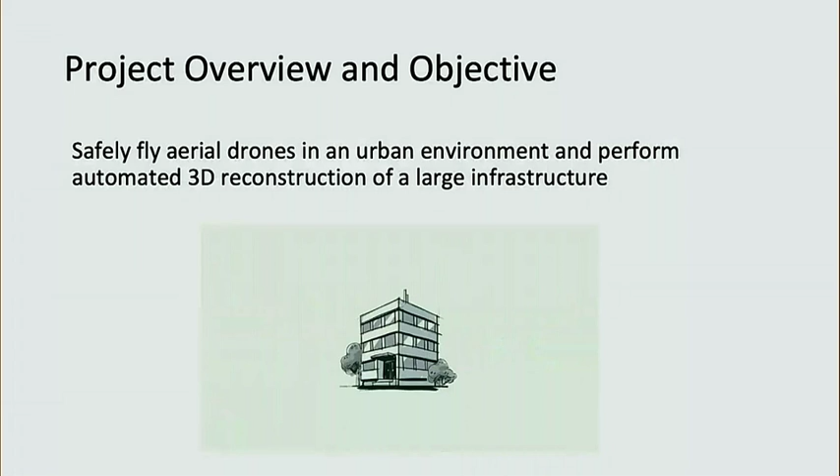So I consider AIRSCAN to be made of three pillars, okay? Under these three pillars are the project leaders and principal investigators. On the safety control side, Claire is going to explain this in more detail, making sure that when the drone is flying in an urban environment, it's going to be safe for humans. Then we have the VR interaction, VR user interface, which Alan is going to explain in more detail.

So some people are wondering what are the applications of AIRSCAN. I can list down three key applications here. Number one is you can use it for monitoring construction projects. In fact, last year I was talking to the DPWH director for monitoring, and he mentioned to me that one of the key challenges of DPWH is monitoring projects in remote areas.

So typically they send engineers to remote areas to take pictures. And he said it's even better if we have a tool that can perform 3D reconstruction, so we know the extent of the progress of the project. DPWH, by the way, is a government department in charge of public works. So before they pay the contractor, they have to ensure that they completed the projects.

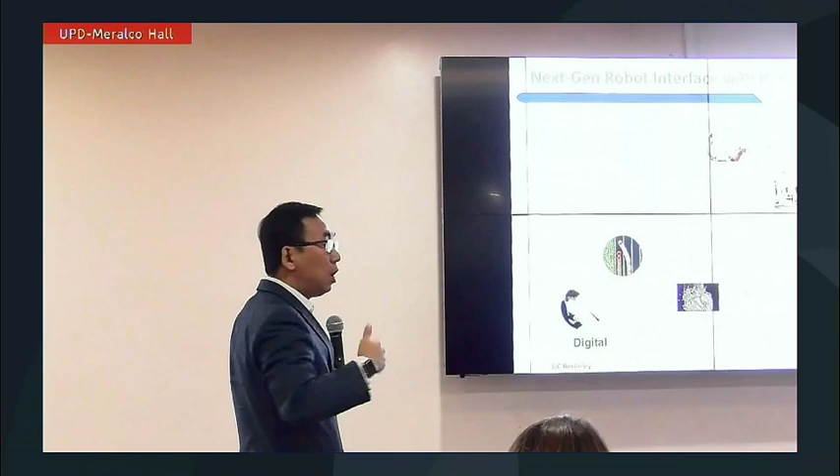When you affect the physical world, you want a certain type of observation of how your behavior caused the change. So you also have perception through sensors. You observe the change of the environment, the change of the human in the world, and then you feed that back to the digital system.

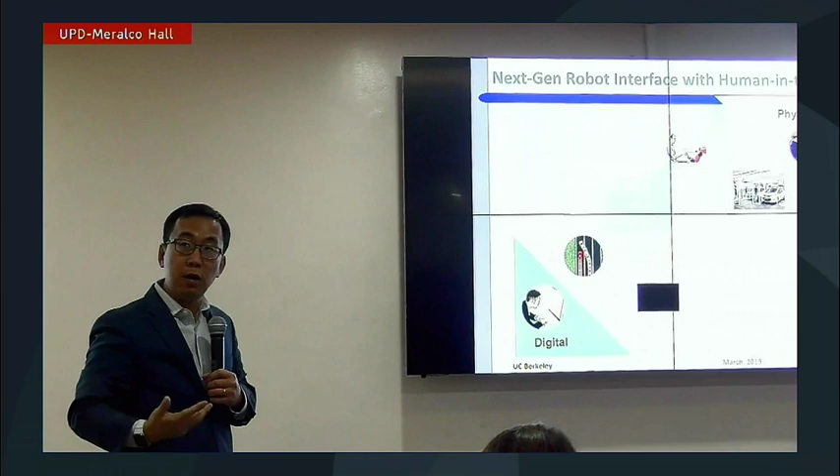Based on that perception input, you potentially want to change the behavior, whether you are driving a car or collaborating with a robot. In this process, humans play a significant role in both changing the control and perception.

Just to give a quick example, I think in the US and many other places, autonomous driving is really a big topic. No matter how much you have heard about autonomous cars crashing on highways, there are a lot more cars crashed by humans than by autonomous cars. So the safety, perception, and control of the human play a much more important role in the behavior of the system, at least for now.

Maybe in the future, cars will be fully autonomous with very little human input. But for now, human input is actually a huge factor that changes the behavior of the system.

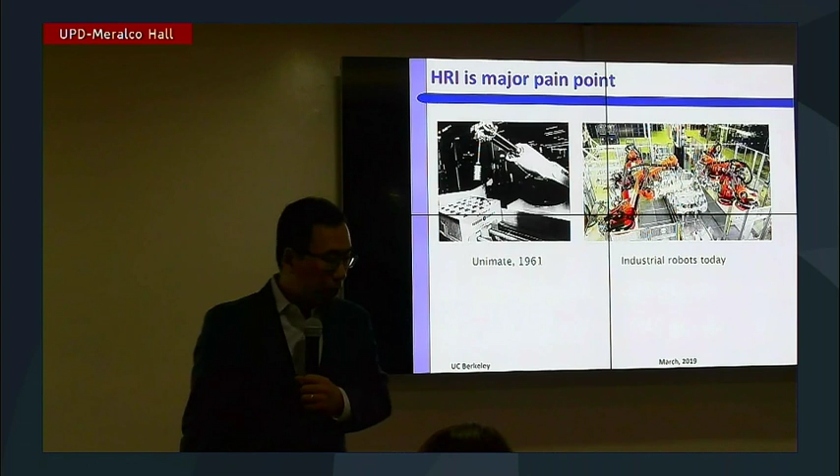So talking about that, this leads to a key observation I want to point out: having a really good human-robot interface is currently a pain point for using robots in man-made environments, especially domestically, when humans and robots are sharing the space.

So that actually was not the case in industrial robots. Let me give you an example. The first industrial robot I can trace on Wikipedia was from 1961, called Unimate. From this picture, you can see it's just a robot working in the assembly line, putting some merchandise into a packing box.

Now, fast forward more than 60 years, if you walk into a typical factory with robots in their manufacturing line, this is the situation you will see. After 60 years, the interface itself hasn't changed. When you look at the machine, either today or 60 years ago, you have no idea what they are doing. So how do you guarantee safety and better control?

Well, in terms of safety, it's the same old thing. You build a fence around the robots, and then you forbid humans from walking close to them, because you may hurt yourself since humans don't understand what the robots are doing, and more importantly, robots don't understand what the humans are doing.

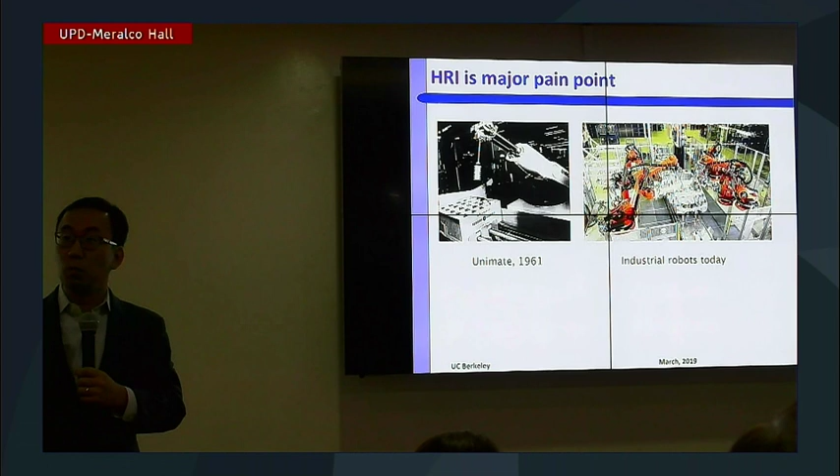And to this point, there is a famous confession, so to speak, from the CEO of Tesla. Tesla is arguably one of the best and most forward-thinking car companies in the US. He tweeted that last year, in the process of pushing out their new Model 3 cars, they made a mistake. He envisioned that in order to make the cars more effectively and safely, he wanted the entire assembly line controlled by robots, with as little human interaction as possible. Then they realized excessive automation at the Tesla factory was a mistake.

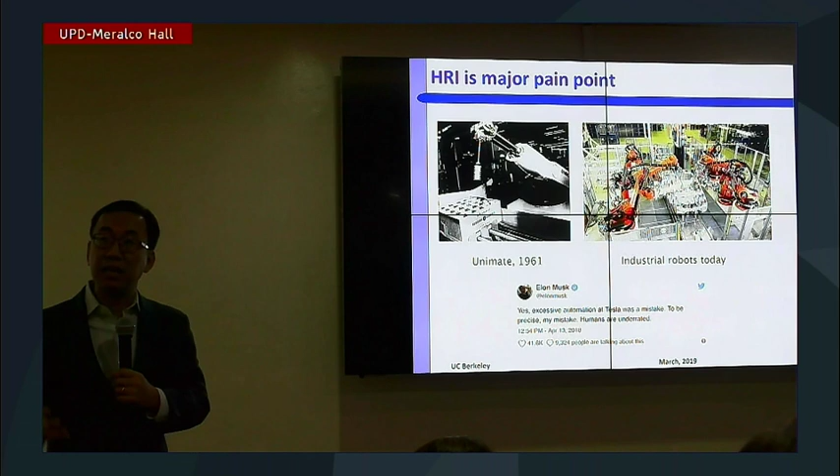In fact, humans are underrated. There are many cases where we still need humans to collaborate with robots. If you, based on today's technology, completely cut out the humans, you will actually compromise safety and compromise efficiency. Okay, so that's the background I wanted to set up.

Now, how do we address this problem? Well, traditionally, one valid way to do that is that you build humanoids. You give them an artificial face and some kind of display, so they can communicate closely with humans. In our group, we actually have a paper that discusses this in a one-on-one conversation setting.

If you have interaction with a human, a real human, there are 4 key cues that really encourage productive conversation or collaboration. Number 1 is expression, a micro expression. The second is head pose. The third is gesture, and the fourth is body scale.

Now, we don't need future technology to give you a subset of this experience. In fact, what we are doing today using Zoom or Skype actually encompasses the first two parts. If you can capture my face, and then capture my head pose, you know what I'm looking at, my attention. So this is the traditional teleconference.

But in addition to that, if you add gesture and body scale in real size, in the real world—so if I am not physically here today in the Philippines, but actually in Berkeley—in the future, imagine I could virtually be here as a full-scale human, and you could see my gesture and my body. That is the immersive experience, enabled by AR and VR, augmented reality and virtual reality.

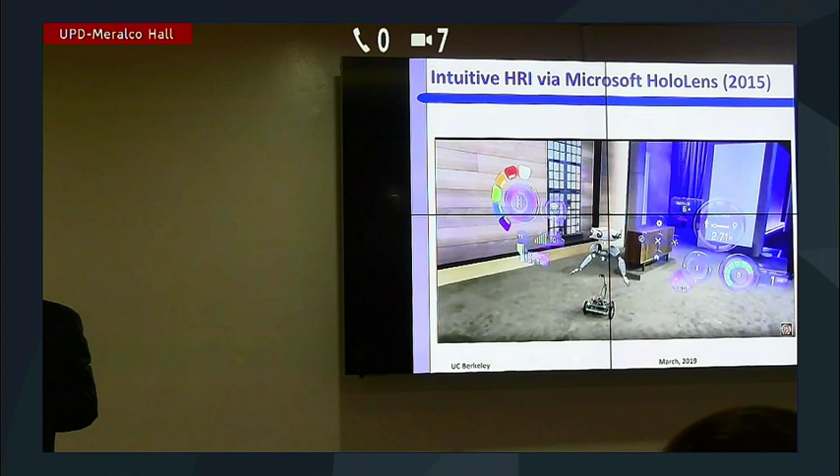Think about that, it's quite amazing, right? Because Microsoft by no means is a main driving force of robot companies. They are not. But when they announced their augmented reality solution for the first time, they were not announcing that for doing Office work or for playing games alone. They were illustrating the best new application for augmented reality, which is to build an interface for robots.

So in this case, whether it's a ground robot or an aerial robot, you quickly realize the robots are moving. The difference between a computer and a robot is computers stay on the desk, they're not going anywhere. But robots are running around. When they're running around, how do you interact with them?

So here, if you don't have augmented reality, all you can see are 4 lights, two green and two red. Green means the forward direction, red means the rear direction. But that's it. You don't know the battery condition, you don't know what kind of task they're doing. You can query that from command lines - you establish a TCP/IP connection and then query it.

But your grandparents may not be able to do that. Your parents may not be able to do that. Your younger sisters and brothers don't want to do that. So how do we do that in a more intuitive way for normal people? I think that is the same vision that Microsoft shared with us.

This video is widely available on YouTube, and in the interest of time, I'm not going to actually play this video from Microsoft. But if you haven't seen it, I highly encourage you to do that. It shows a dynamic path planning example that is very similar to what we do in controlling drones.

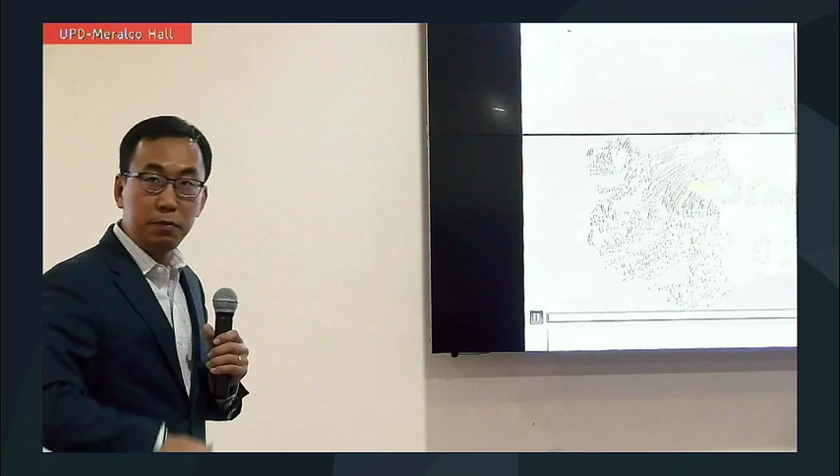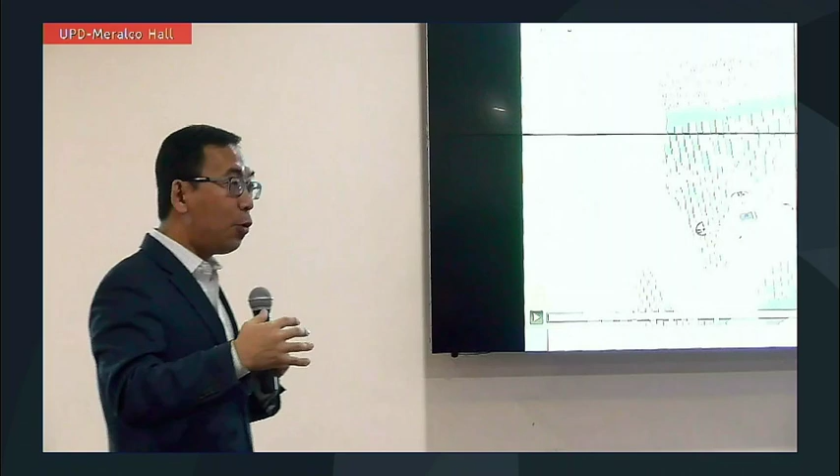So this is a video we just got last week, a collaboration with the nuclear engineering department. Imagine you have a collapsed nuclear power plant - I'm not going to say what is real, what's not real. Because the building has collapsed, when you fly the drone you cannot rely on offline 3D reconstruction. You have to reconstruct the world in real time.

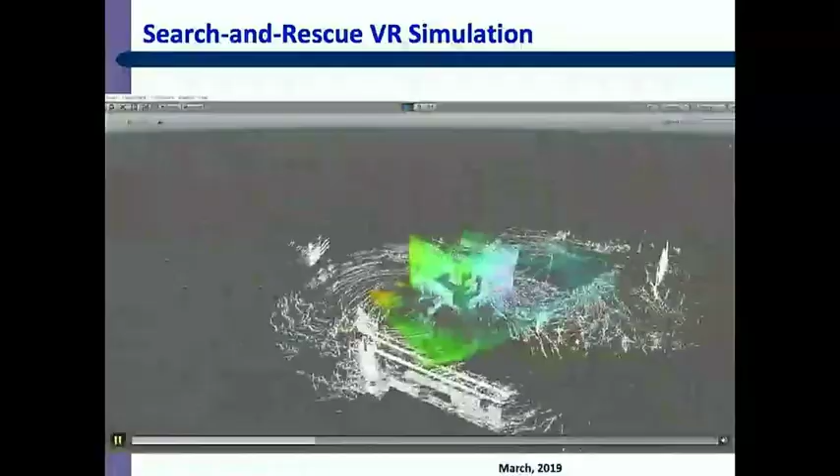So you are seeing a drone carrying LiDAR scanning the world in real time. In addition, the drone also carries a radiation detector integrated into it. So you actually see the overlay of the radiation sources with the 3D reconstruction. Now, this is the result you get from the drone.

Now, when you have a real-world rescue team coming in on the ground wearing something like HoloLens, they can actually overlay the most important information about the radiation on their head-up display. So they will know where the radiation sources are beforehand, so they can avoid those areas. That will really save time, save rescuers' time, and also potentially save victims' time.

So this is a more complex test. We are already working on some other funded projects, and the second one is extending our project to multiple drones. We are able to expand the capability of our system to do that, to get an overall view of the scene.

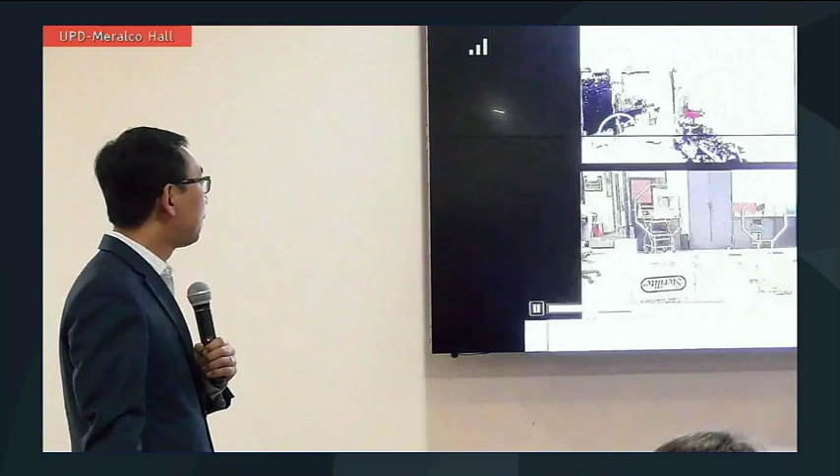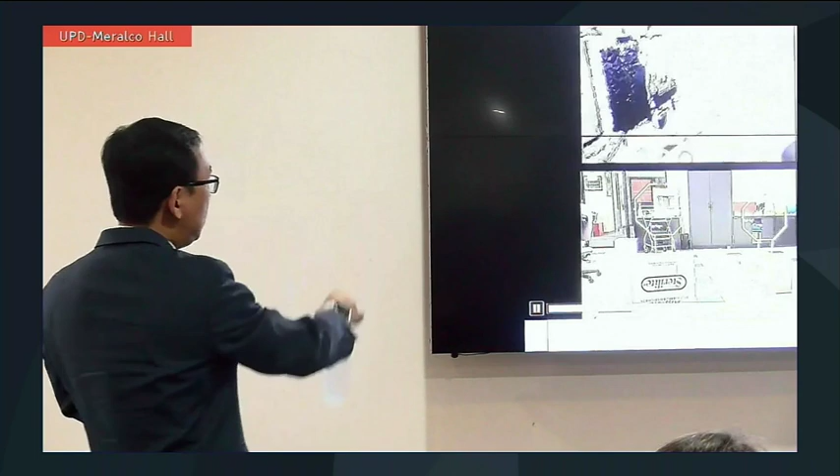As I mentioned, some of the things we want to push forward - but the purpose of showing you this video is to show you that our system works. After the launch button is triggered, the lower right side shows the real world execution of the drones. The location of the drones is synced up in real time into the virtual world, so you can see in real time where the drones are. If the drone is deviating from your plan, you can always grab the drone and ask it to stop.

So that's the first extension. The second extension is to the interface itself. In addition to saying that it is safer and more efficient compared to manual control, now we want to go past that. We ask, if we are already in the virtual space or augmented space, what's the sense of optimality? How can we design a system that's better than the first virtual reality system?

The challenges in designing the 3D UI UX and establishing a sense of optimality come from several factors. The number one is absence of a design standard for 3D UI. Think about it - since the 80s people have been using keyboard and mouse for 2D design, so the methodology has been established. If you're an app developer, you don't have to worry about the user interface, because it's provided to you as an API whether you're using iOS, Android, or Windows and so on. But in 3D, currently there is no standard for 3D UI.

Even worse, the problem without a standard is that if you have two teams developing the same function for controlling drones, it's very likely that application 1 has one way to control the drone, and application 2 has a totally different way. So doing this transition, not many typical users can do that. That's really the pain point hurting the 3D interface.

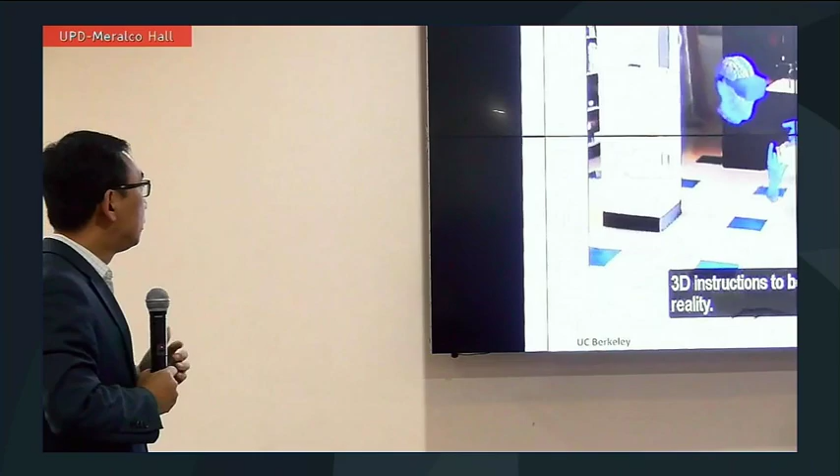So let me show you, if we have all this interaction integrated, what kind of experience we can have. Instead of flying drones, let's talk about maintaining drones - a solution that allows 3D instructions to be overlaid in augmented reality. First, you scan this drone, so you have a scanned drone model.

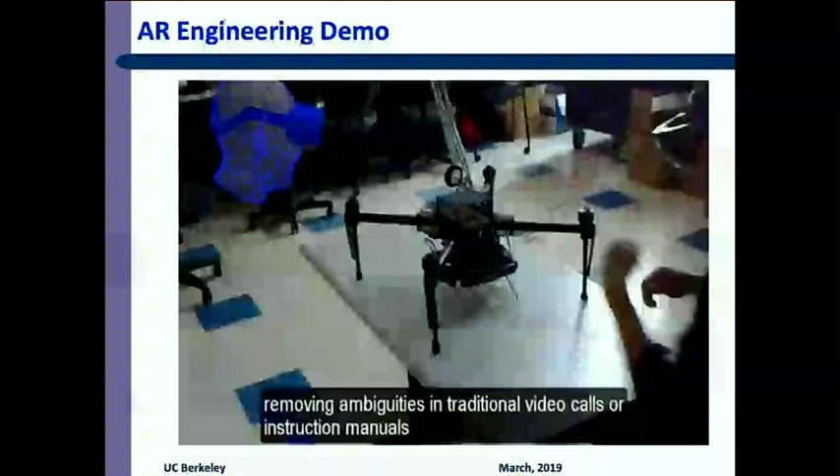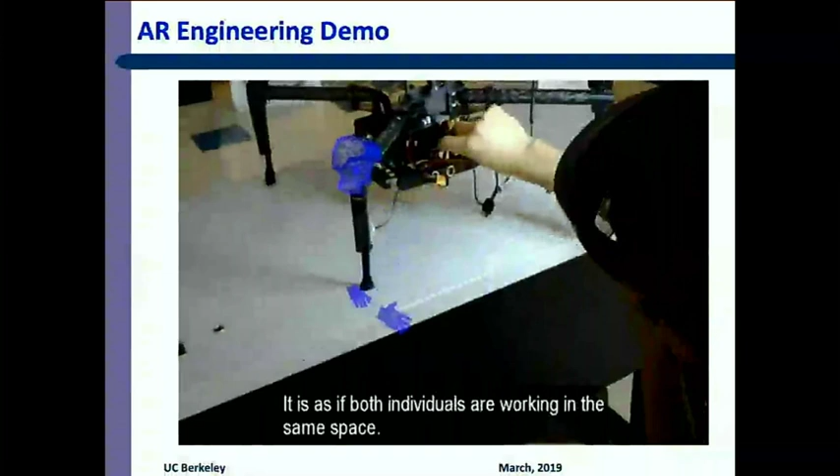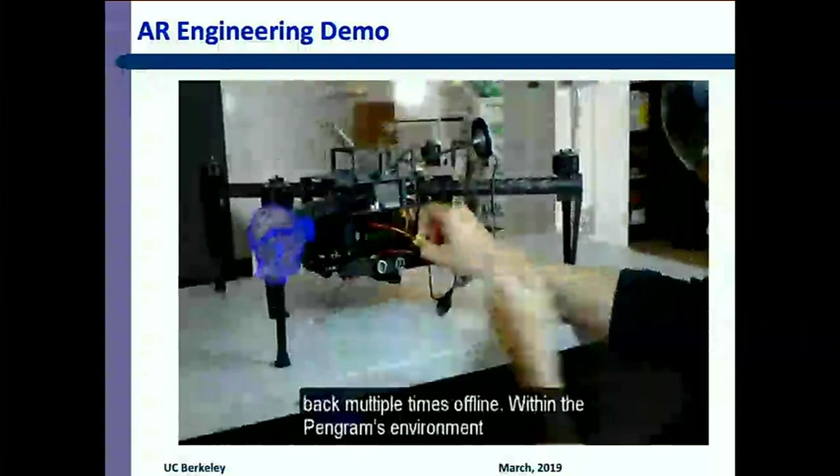As you're looking at the drone in real time, the system can resolve the location of your head, your display, relative to the drone. Once you have that, you can overlay the manual 3D model of this drone as you try to make changes to this model in the real world. You can also augment a virtual expert to guide you in 3D - this isn't reading the manual anymore, this is really like holding your hand in the 3D world.

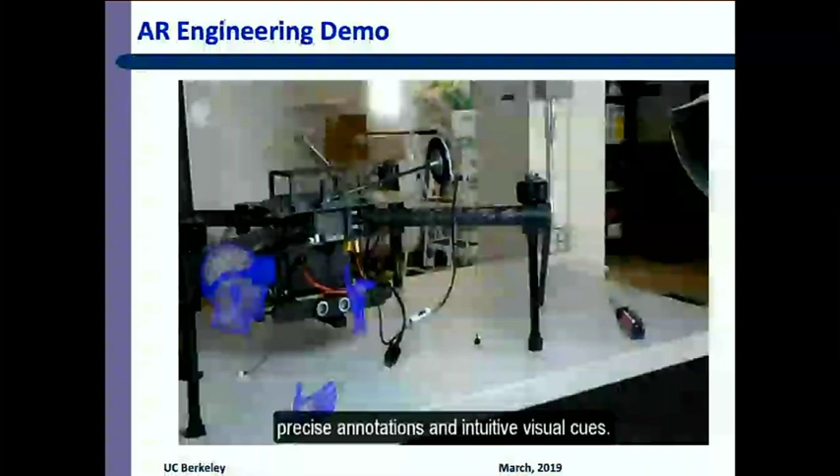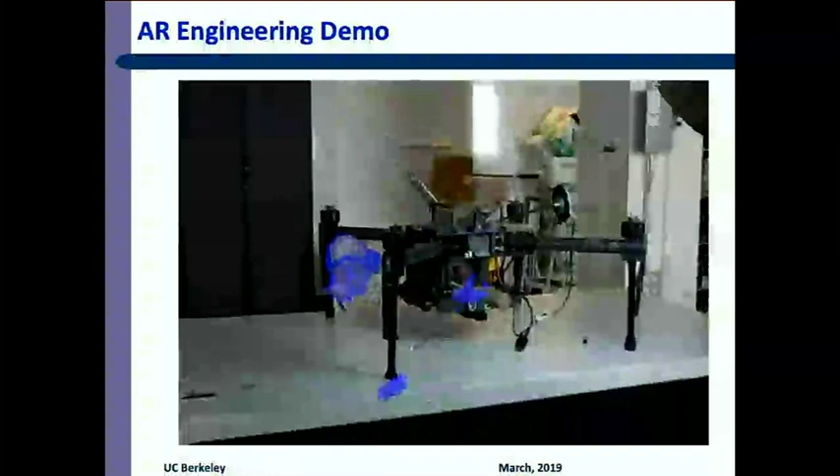The creation of precise annotations and intuitive visual cues - the goal of our program is to eliminate ambiguities that come with complex operations. You can also illustrate what kind of tool you need, and set parameters for the tool so that you don't over-screw or put too much pressure on your screwdriver, and so forth.

Our system actually received the 2018 Microsoft Imagine Cup World Finals, the only mixed reality award, and is also the only US team that received that award.

So I see that I have 5 more minutes. So 2 more minutes? Okay, let me actually go very quickly.

We also have 2 papers published that really try to test the optimality of converting people from designing in 2D versus designing in 3D. Across 4 different hypotheses, we win a lot in the intuitive department, ease of control, and mental frustration - because reading a manual in 2D is really frustrating. The only thing we lose is physical discomfort - there's still a lot of discomfort in wearing VR, but that's contributing to the VR system.

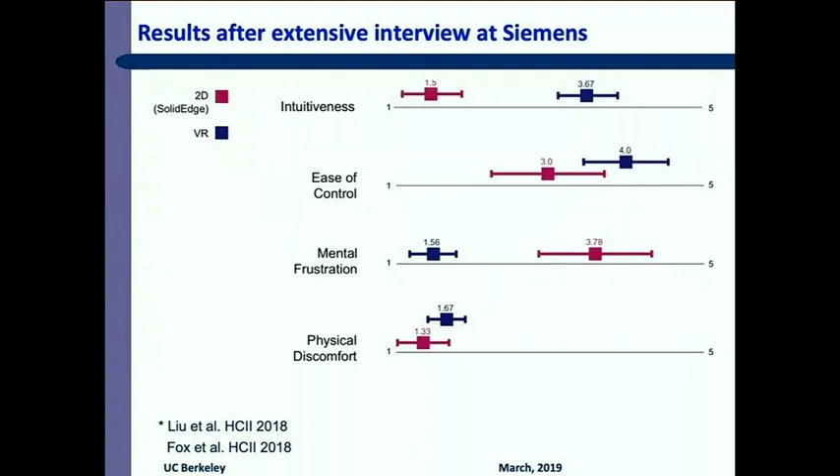Let me also mention this, I think it's important, and then I'll quickly wrap up. We learned 3 things. This was in collaboration with Siemens - Siemens was very generous and opened up their workforce, and we tested on their field engineers.

What we learned is environment matters. When you put virtual objects in the world, the location of the object with respect to you in terms of size and location matters - if the size isn't the real size, people have to do translation, and that causes mental fatigue. Second, if you put the object too far away from people, outside arm's reach, people also get frustrated.

That's number 1. Number 2 is having a tutorial is very, very important. I didn't emphasize this earlier, but in our previous user testing, before users started flying the drone, we always had a tutorial for them.

If you ignore the tutorial and imagine virtual reality just like real reality, and put people right into it, they don't get it because they actually know more about keyboard and mouse. If you tell them to control drones using keyboard and mouse, they learn faster than in virtual reality. So currently, the learning curve in VR is still a bit higher. But once they get to know VR to a certain level, they really perform well.

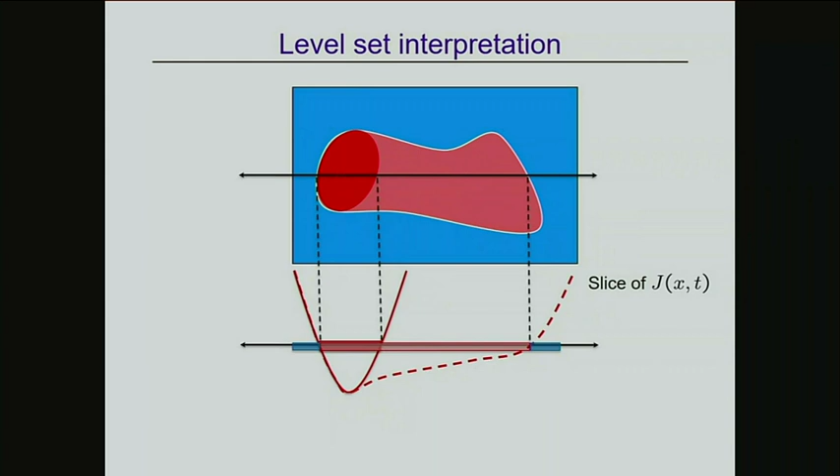If you've calculated a reachable set, you know that any super zero level set of that can also be used to verify safety. So if you've computed a set that you don't want to get into, and you don't get into any over-approximation of that set, you're not going to get into the set itself. That's useful. And the more you know about the dynamics and the uncertainties, the less conservative the set is.

We've developed a methodology for computing this and a toolbox. At the bottom, there's a web link. Ian Mitchell was my first PhD student, and now he's a professor in Vancouver, Canada at the University of British Columbia. He took those mathematical concepts and wrote a toolbox, and you can download this, open source, freely available, wonderful.

He's great at commenting and writing manuals, so there are manuals, you can pull out his examples, plug in your own, and do this computation.

This is one of the first examples that we ran. On the left are old quad rotors, from when I was still at Stanford, when you couldn't buy quad rotors easily. You had to build them, so we built our own. There are 4 students and 4 quad rotors, and each student is joysticking a quad rotor around.

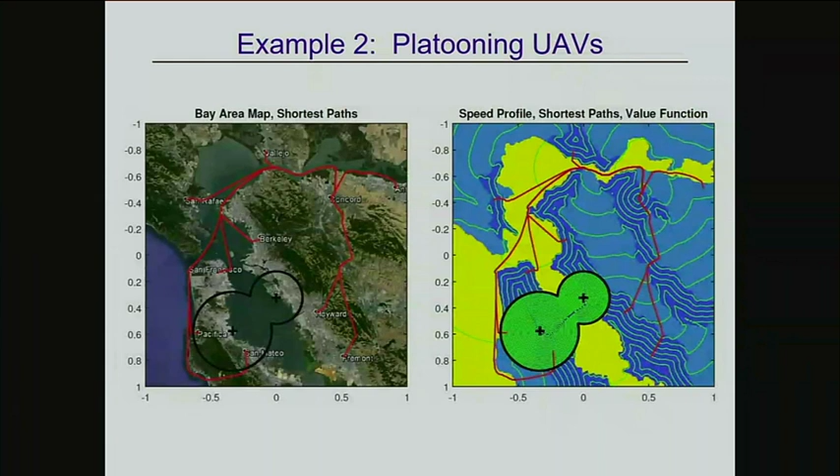We worked with both NASA and Amazon on essentially air traffic control, but for drones. It's called UTM, Unmanned Aircraft System Traffic Management. The interesting problems are: what is automated, and what is human controlled? There's going to be much less human control in UAV management versus traditional air traffic control.

So we used an old routine called platooning. Platooning is an idea where you route a bunch of vehicles along the same route, flying at the same velocity, so they really only have to maintain separation with respect to the vehicle in front and behind. Then you design a control scheme that ensures that's safe.

We use reachability to design the control scheme, to figure out when a vehicle should switch from a free mode, flying off one of these highways in the sky or trunk routes, to being a leader or follower in a platoon, and then having a fault mode, which means changing altitude lower or higher.

I'll show the reachable sets for a couple of different scenarios. Here we have two vehicles, a red and a blue vehicle, trying to track a moving target on one of these highways in the sky and snap onto it. The reach-avoid operator here means each vehicle wants to reach that target while avoiding the other vehicle.

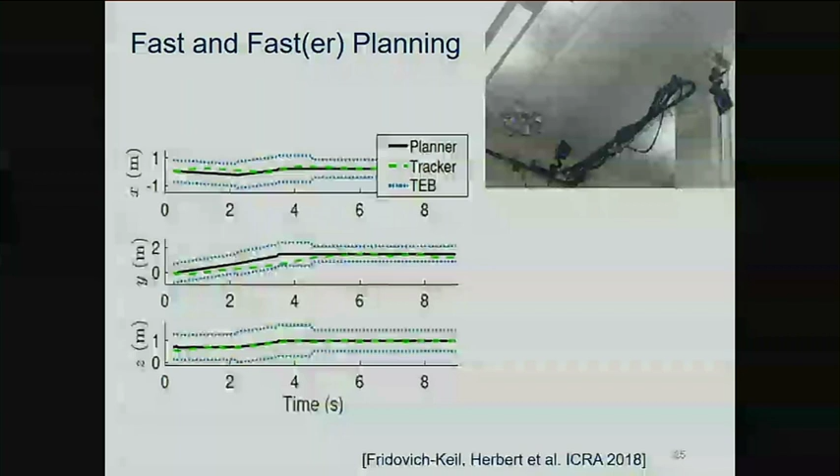So now you can do all sorts of things with it. You can ask, what if I had a bunch of different qualities of models? So I've got my 3D point mass, that's my lowest dimensional model, and then I have my 12D model, that's my highest dimensional model. But maybe if I'm in a wide open space, like in the front of this room where there's not much in terms of obstacles, I don't really need a 12-dimensional model. I could plan with a 6D model, and that becomes a lot faster. I can compute that quickly. But when I'm moving up in sort of a narrow corridor, I have to be a little bit more careful.

So you can see this TEB stands for tracking error bound. That's the buffer that we're computing. And here we're switching from a wider buffer to a smaller buffer. It's basically going from a faster planner to a slower planner. So fast planning in wide open environments to slow planning in narrow environments, but always maintaining that safety guarantee. And what's more, reachability can tell you exactly when you have to switch, as long as you have the preview of when you have to switch from a fast planner to a slow planner.

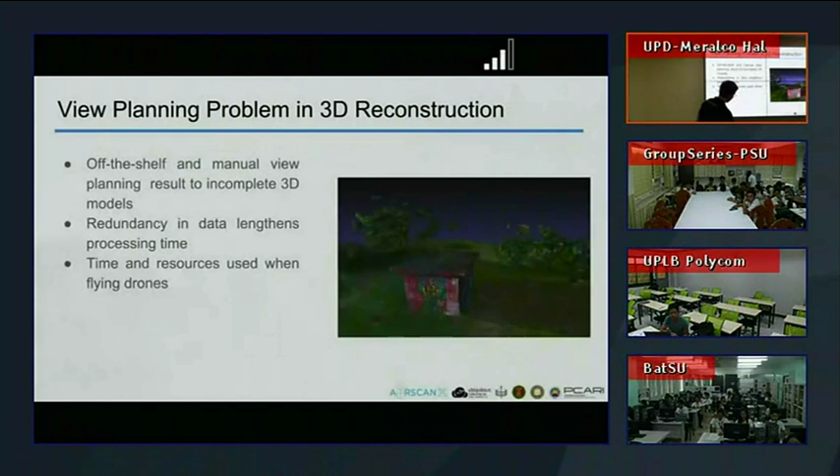In doing large-scale reconstruction, we use drones. Drones have limited flight time, and in doing these experiments and missions, we spend a lot of time and resources mapping large infrastructure. So we propose an algorithm we call Efficient View Planning via Reinforcement Learning.

This algorithm is motivated by how a human artist draws a subject. If you're an artist drawing a portrait, you first look at the subject, draw the general outline of the face, then look at specific parts like the eyes and draw that, then the nose, and so on. It's an iterative process until you arrive at a drawing you're satisfied with compared to the subject.

So we ask the question: can an AI agent learn to autonomously scan a house in a much more human-like manner? We use reinforcement learning because it's also an iterative process where an agent could discover an optimized path for doing 3D reconstruction.

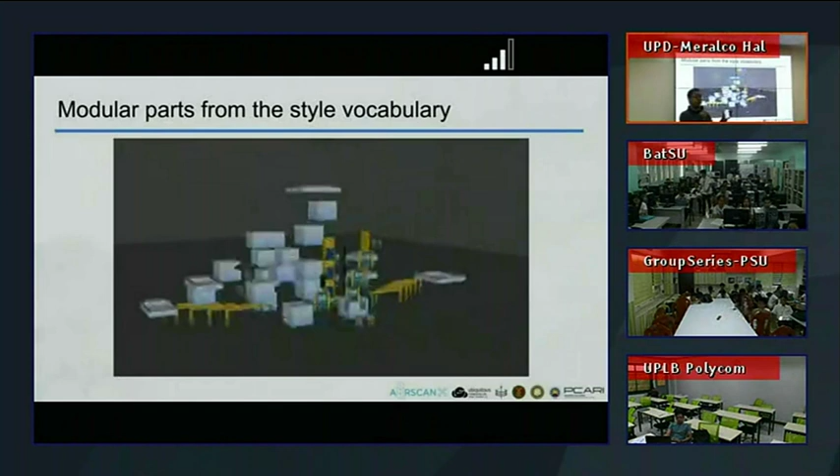So every batch of modular assets, we target to create at least 50 different house models with each. Each house model is iterated using 5 different textures to give more variety.

After we created those house models, we evaluate them by running them in Unreal Engine and using Open Drone Map to validate if the texture and structure of the houses we created in 3D is good enough for 3D reconstruction.

There are some fail cases in the 3D reconstruction where the initial reconstruction image is pretty messed up with not good structure. This usually happens when the wall and house structure have less detail.

As of now, Houses3K has 12 modular batches. Each of the 12 modular batches has 50 FBX and OBJ models, fully textured and able to be rendered. Each of the 50 models has 5 different texture maps, with diffuse and normal maps.